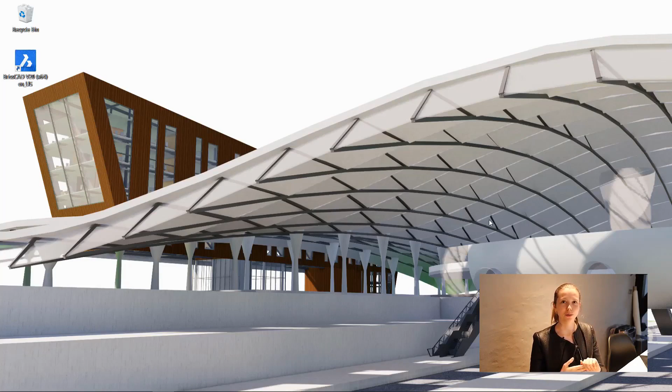We will use the profiles panel from which we will import profiles. We will use propagate to propagate details around our drawing. You will see just how powerful propagate is in combination with the details panel, where you can store details and where details can be parameterized so that they adapt themselves towards the new steel structure.

In this part, we will start by opening BricsCAD. You will be probably familiar with our workspace. We now need the BIM workspace, so I will open the BIM workspace, and then you can open a new drawing in a millimeter template. So choose BIM millimeter and choose new drawing.

So then you will see this interface. You are probably familiar with it. Remember, if you don't like the dark UI, you can always change it by right-clicking somewhere and changing to the white UI, but I will record this in dark UI because I'm quite a fan of it.

So what we will start off with is a grid. Launch your no-selection quad by right-clicking on empty space, and go to the model tab. There you can find the rectangular grid and choose grid to get started.

You will see that it's asking me to enter a first point. Down here at the bottom, you see enter first point. I will choose 0, 0, so I just type in 0, 0 and it will start there. Then if I scroll out a bit, you see that as I move my cursor, the grid is attached to the cursor, and I'm able to dynamically adjust my grid.

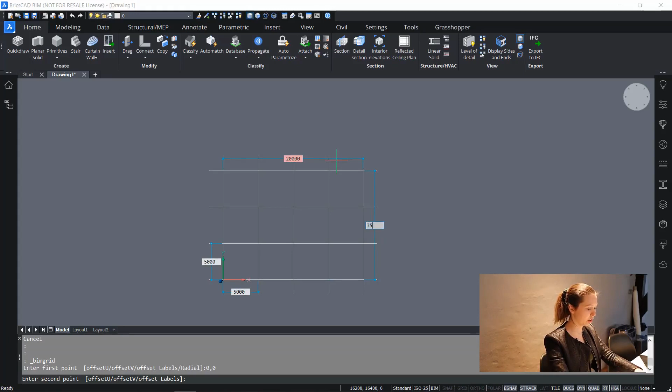You can start off by defining the dynamic dimensions of the grid cells itself, and then going to the overall dimensions. For this, we need just 5,000 by 5,000 grid cells, so we leave it as it is. Then we go to 20,000 for the width, and 35,000 for the length. If I press tab, I can switch to the next dynamic dimension, and you see the preview of the values already put in. If I now press enter, it will accept those defaults.

Then you will see a grid is created, which is automatically numbered from 1 to 5 and from A till H. If you would like to change this grid, a small reminder: you can use block edit.

Bedit is the command for that. So choose your grid and type in bedit. You will be taken into the create or edit block definition dialog, where you can choose your grid and choose OK. And then you see your grid as it is.

You can move grid lines by just using the move command or the manipulator. You can copy grid lines, that's the easiest way to add new grid lines. And you can see then in the properties tab, you don't see the numbers here, but in the properties tab the numbers are there anyway.

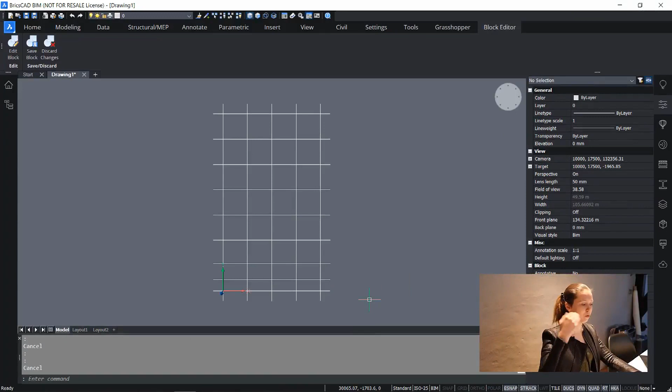So down here you see the BIM type is the grid axis and the number is B. That's because we copied the B element. If I stand on the second one, it's also B. So now I have grid lines A, B, B, C, D, and so on. I don't want that. I want to renumber them. So how do you do that?

You can use the number command. Just type in number. Select entities to number - those are the axes along the Y direction. Then you can say which number style you want, so type in N for number style, and then I want letters, so I type in the third option.

It won't sort them automatically in the Y direction, so you have to sort the entities again by using entity sorting. Type in E and specify that you want to sort them along the Y direction, then press enter again, and it will ask you to provide the first index. I provide 1 because this corresponds with A. If I now check my numbers, you see number A, then number B, number C, number D.

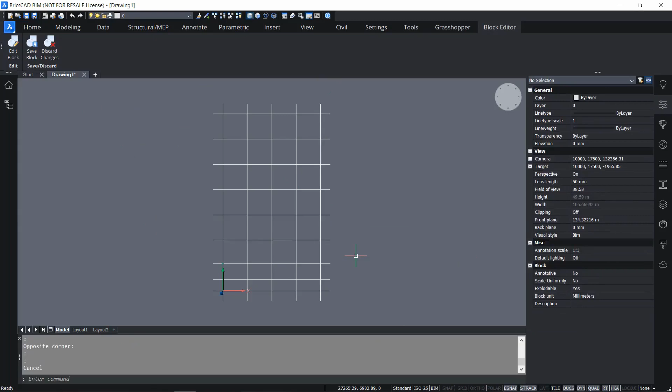And if I would now save the drawing, my grid would look like this. I don't want that now, so I will undo my changes and go back to the grid as we had it previously. You can save the drawing so that you don't lose it, so I will save it as Steel Hall.

You can also save through the BricsCAD icon and going to save or save as, or just type in Ctrl S like I did.

Remember, if you get lost along the way, there are also intermediate files. I will show you these. If I go to training, intermediate files, structural modeling, you will see structural 3, 4, 5.1. The name of the drawing corresponds to the step at which you can use it, so structural 3 is ready for step 3, allowing you to follow along easily.

So that's the first thing we want to do, is create the grid. But because we want to model further onto the grid and use propagate onto it, we also need a base slab to have this grid attached to a real 3D object.

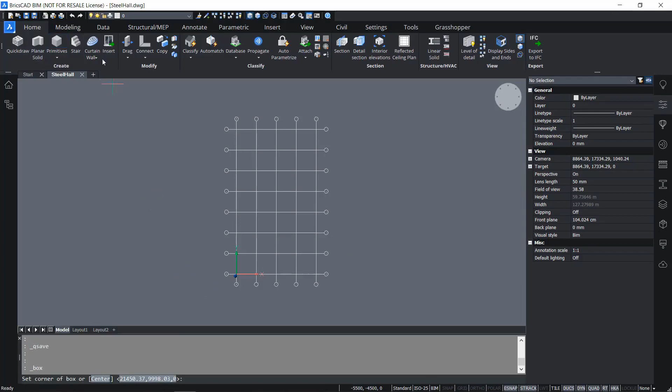So I choose box from the create tab, and I draw a rectangle as a base, and then if I go into perspective mode, you will see that I'm dragging it downwards, moving my cursor down by 500. That's the value I type in.

And then you see that I have a slab with a grid on top of it. I will give my grid a color so you can better see it. So this is now a grid with a slab underneath it. That's the first step you need to do, is making this grid.

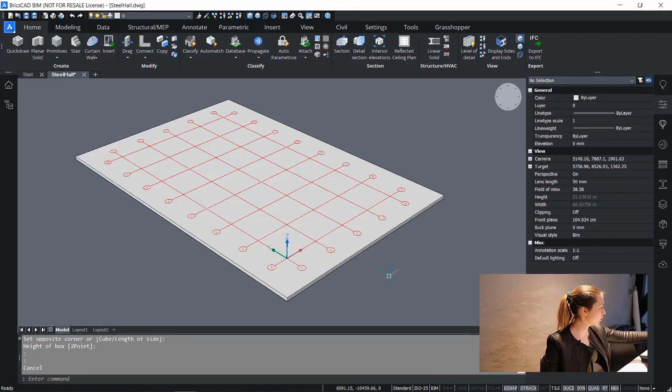The next step is to apply a profile from the profile library. So go to the structural steel domain. You can filter at the top of the profiles panel to structural steel. If you don't see the profiles panel, right click on empty space, go to panels, then BIM profiles, and make sure it's checked on. It will appear as an I shape in your stackable panels. You can now filter through the domains, structural steel, and the standard.

We will use the Euro standard for the entire duration of this exercise. Of course you could use other standards, but for this scope we'll focus on the Euro standard. Then you can search for HEA. You already see them here, but if you're confused which ones to use, it's the HEA.

So drag and drop the Euro HEA 300 profile into empty space. And if you zoom into your cursor, you'll see that a profile is attached to it. This means you can start drawing a profile.

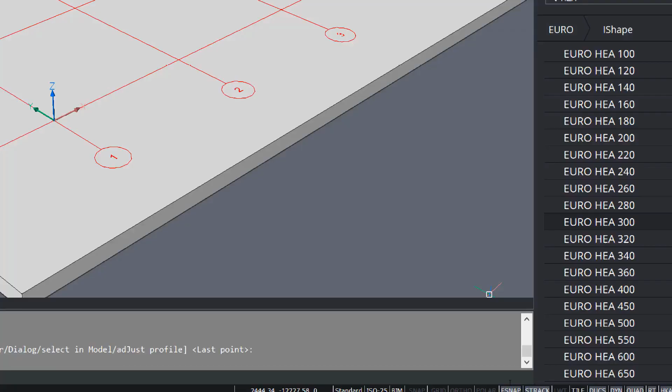I will escape for a moment because you need to turn on a setting, namely eSnap. Right click on it and put intersection on, so if a box is around it, it's on. Also turn on endpoint and midpoint since we'll need them further in this exercise. Make sure eSnap is toggled on - you see it highlighted - and you can also put ortho mode on to draw orthogonally in your drawing.

So drag and drop Euro HEA 300 in your drawing again, and zoom to the intersection of grid line 1 and A. You see that now it says it's found the intersection.

I click on the intersection, and then because ortho mode is on, you can draw orthogonally in all directions according to your current user coordinate system, which is currently the world coordinate system because we haven't edited anything.

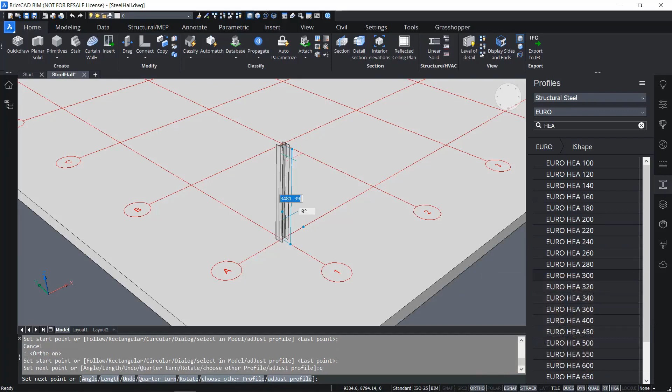You see that now my profile's flanges are aligned with the A axis, and I want them aligned with the 1 axis. So to change that, I type in Q for quarter turn, and then you see my profile changes by a quarter turn.

Draw orthogonally upwards and type in 5000 for the height, press tab to see a preview, press enter to accept. Then you see you can still model further, but we don't want that now - we just want this one column. So just press enter again or escape, and you'll exit the command.

What I now want to do is propagate this profile over to all of the grid intersections. I will do that using the propagate command. But first we will take a look at the column itself.

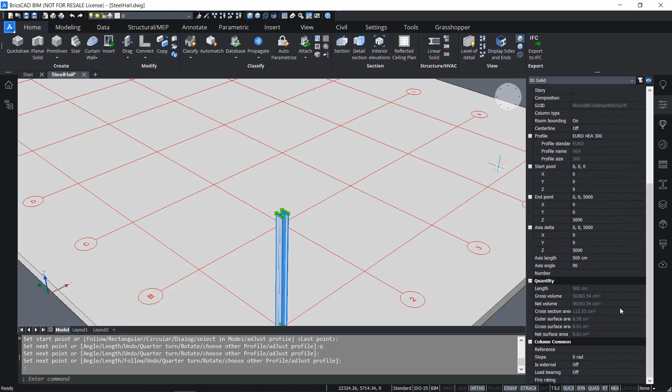Because we dragged and dropped it from the profile library, it will automatically be classified as a column because it's standing upwards. It will automatically have a profile, Euro HEA 300, and you'll see some other BIM properties you could assign if you'd like. But now we will just propagate this column over to all the locations in the grid.

For that, we will use the propagate tool. So launch propagate from the top under the classify tab. And then it's asking us to select base solids.

The base solid is what propagate will look at to find a similar location. We want it to be the grid intersection lines, just like the one it's standing on. But the column isn't standing on only the grid, it's also standing on the slab, and the slab has a grid attached to it. So the slab is the base solid because we want to propagate to other locations on this slab, which are defined by the grid. The grid itself is not a base solid because it's not a solid, the slab is.

The detail object is of course the column itself. So select the column. Remember to press Control if you have face detection toggled on. For now I want everything off, so no display sides and ends, no edge prioritization or face prioritization. I just want to select the whole solids, so I can easily select the sub-detail without holding Control, because my selection is set to select entire solids.

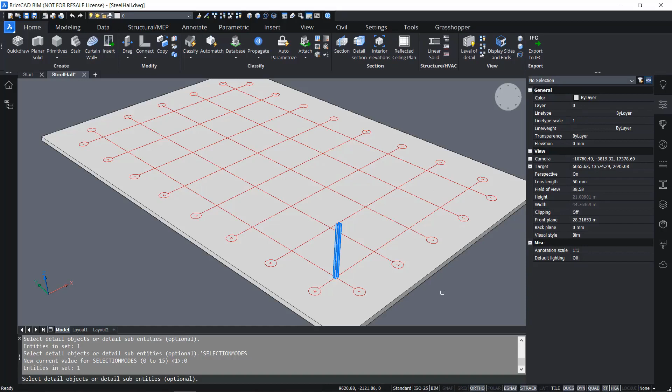Then I can press enter, and it will ask if this is what I want to propagate, asking me to propagate as a block or as a copy. You can propagate as a block if you want the detail object to always be the same, and if you don't want to model further onto it. But now I want to model further onto this column, so I want to propagate it as a copy, not as a block. So I type in C and press enter.

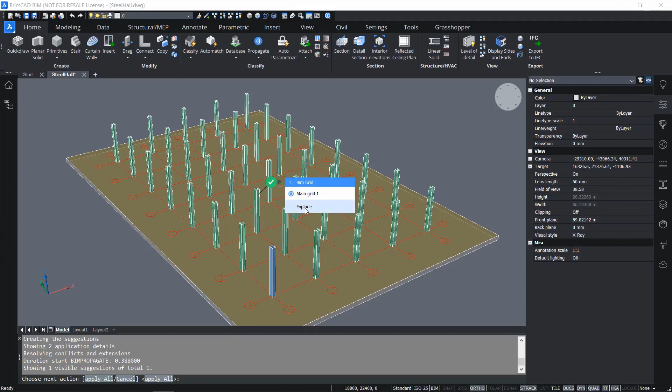You see it detects the grid and applies a profile onto all the grids, but I want to explode it into all the different options that are available. So I click on grid and then I click on explode.

Then it's exploding into all possible suggestions. You can toggle off the mid suggestions because we don't need them. Just make a selection box over the checkmark icons and toggle them all off by clicking once on them. Hide those you toggled off by pressing enter once, and accept those you still have left by clicking enter again.

And then you see this is what we wanted: the columns for the steel hall. We will now model further with the first two in the row, so I will isolate those. In the quad, go to the Select tab and go to Isolate Entities, and then you will see those entities which are isolated.

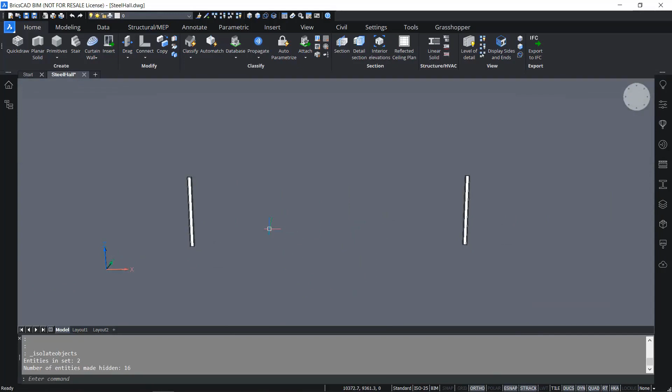Then I want to draw a line, so I type in line, or go to the Annotate tab and go to the line command. Then I start from the inside of the beam. Remember your display sides and ends is off, and also display axis is off. So go to the Structural tab, and in the View tab make sure everything is toggled off, because otherwise if you display axis you can only snap to the axis endpoint, and if you display sides and ends you will snap to the sides and ends. We want to snap to the real geometry of the column.

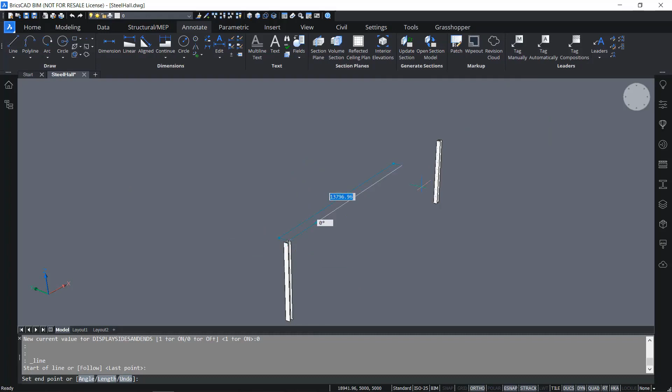So we want only nothing selected as snap, except for the midpoint, which we toggled on previously by going to eSnap and toggling midpoint on. Again, go to the Annotate tab, choose line, go from the inside of the column, the one facing the other column, and snap to the midpoint, the midpoint of the flange to the inside of the other column. If your ortho mode is still on, you will only be able to draw in orthogonal directions. That's convenient now, because we only want to snap to the other midpoint, which is orthogonal. So snap to the other midpoint that's inside of the column.

Then if I show you in non-perspective mode, by right-clicking on the look-from icon and choosing perspective off, you see that I drew a line that connects the insides of the columns.

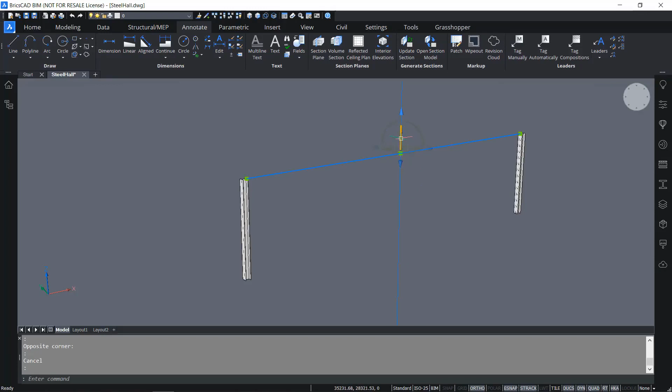So I will put perspective back on, and we will now move this line downwards. If you have nothing selected, press escape, then long click the line until the manipulator shows up. We already used that in previous exercises to mirror and move things. Now we choose the down axis and move our line 400 downwards by typing 400 in the input field, and you see it's moved 400 down.

Now I want to make a truss from this line. You could model everything by dragging and dropping a profile directly into your model space, but what we will do now is draw lines, and from these lines convert them into profiles and make a truss out of this.

So I will construct a truss from this by drawing a few more lines. I hit the line command again, snap to the midpoint of the line I drew previously, and draw upwards 1400, with ortho mode on so I can model further. I'll put ortho mode off now because I need to go to the midpoint of the inside of the flange again. Then I press enter, and I have the shape of the truss I wanted. In between those two lines I will weave a pattern, making the truss of my structure.

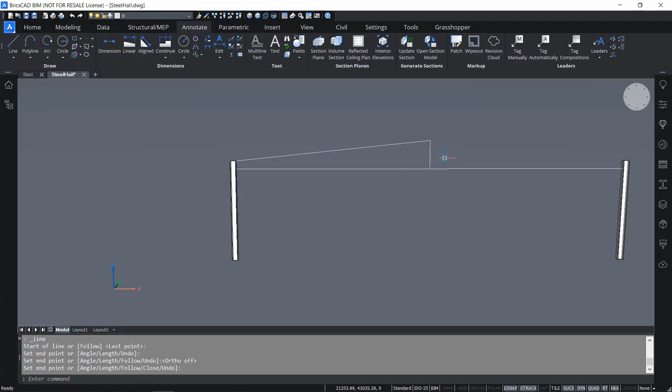Now you have the big beams of your structure, but not the little members that make up the truss diagonals. So what I'll do now is divide the upper and lower lines into small points, denoting a specific division of each line. The line will not literally be divided into smaller lines - points will simply appear at the division points.

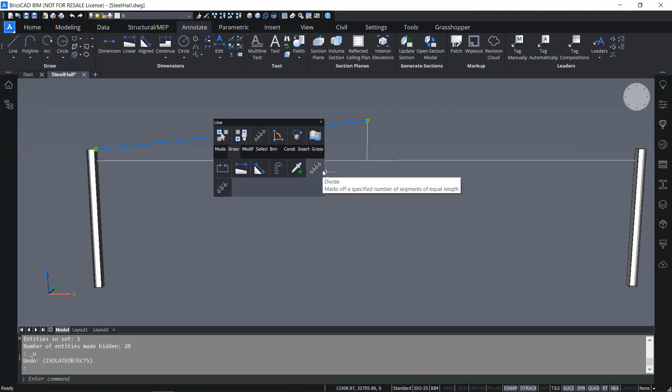So I stand on the line and go to the Draw tab of my quad and select Divide. Make sure you don't select Measure, because this icon looks similar, but select the Divide command and click it. Then it asks me to enter a number of segments - you can see in the command line at the bottom of my screen that it's asking for a number of segments. I want 10 segments, so I click enter.

You don't see anything happen yet, you would think, but if I make a selection box over this, you see that it has created some points. But how can you display these points easily?

That's a setting. If you type in settings and go to PD mode, that's the point display mode, you can uncollapse it and choose, instead of 0 which represents a point, 3, which represents a cross. If the point display size is on 0, it will automatically adapt to your zoom level for the preview. So now it previews as a cross with a dynamic point size. You can close settings, and as you can see, we can now visualize the points, and whether I scroll in or out, they always display as the same amount of pixels on my screen. That's convenient to see what we're doing.

Again, we want to divide the lower line into an amount of segments as well. Because this is twice as long, I will divide it into twice as many segments, namely 20. So the divide command should be the first one to pop up on your quad - select it and type in 20 for the amount of segments. Then you can see it's nicely divided into as many segments for both the upper and lower line, and we will now weave a pattern in between that.

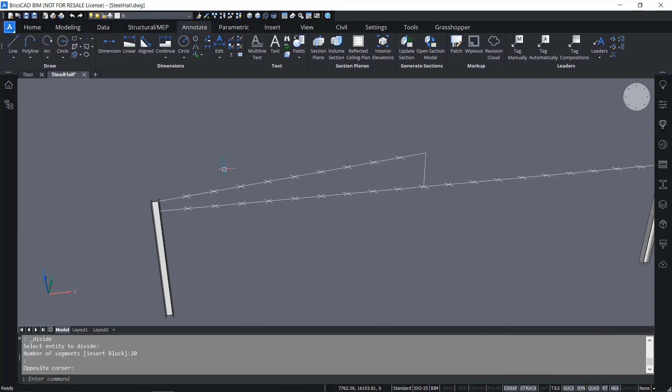For that, your endpoint selections should be on, your eSnap should be on, and your node eSnap should be on - which I haven't mentioned yet - so you can snap towards the points. With me it was already on, so I can launch the line command again and start drawing from the endpoint of the line, go upwards to the first node, go downwards to skip one of the nodes, and weave a pattern in between those.

Just like this, so that you actually created a truss. I can show you again if I go to the front view and put perspective back off. You will see that now I created a truss, which is good. This is what I wanted. So this is now a truss, but it's only half of a truss.

So we will need to mirror the first half to create a whole truss. But first I will delete the points because I don't need them anymore. Select the points in the structure browser. Just go to the structure browser, uncollapse entities, and delete the points by hitting the delete button on your keyboard.

And then I can start mirroring the lines. So select the lines you want to mirror, and then from the quad display in the modify tab, you display the manipulator, and it will show up somewhere in the middle probably. We want to reposition it. How do you do that?

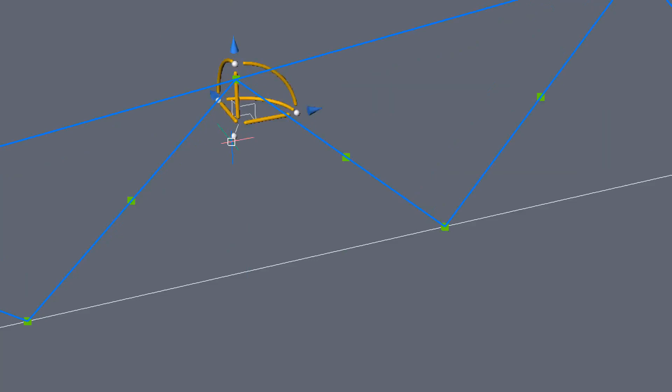You can click the white grip, and then you can move where the manipulator is standing. I want to move it to this midpoint, and it shouldn't be rotated, because if you snap to another line that's a diagonal, for example, then it will rotate itself. That's because your dynamic UCS is on, so it will rotate itself to the dynamic user coordinate system, which it detects from the entity.

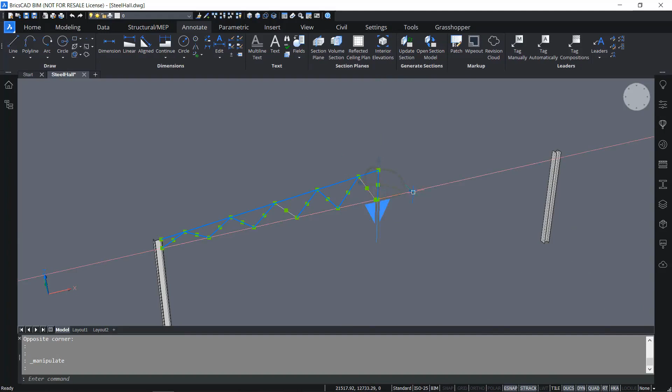So you just want to position it in the middle here, and then we want to mirror. How do you do that? You have these blue lines, these blue arrows, and these are the ones that you need for mirroring. So I select the one in the X direction, and then you see I'm mirroring this entity. If I don't do anything, it will just mirror it and won't make a copy or anything.

So to make a copy, type in C and press enter. Then it says copy mode, multiple copies, which is what we want. Then you can enter a distance of 0, because it just needs to be mirrored along the position where we positioned our manipulator before. So press 0, then press enter again, and escape to exit the command.

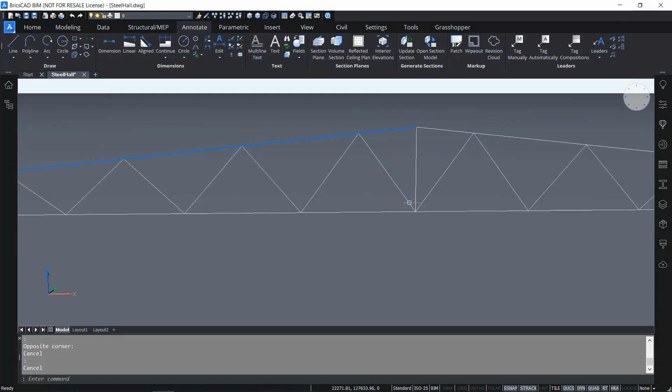And then you have this truss like you would want. I see that I haven't snapped appropriately to the endpoints, so I will adjust that so it's snapped towards the endpoints as we want it. You see that even after you modeled, you can still adjust your lines to what you need, because now that it was mirrored, I saw that these two lines did not converge in one point. So now I adjusted that. You would probably already have it correctly.

If I now delete this middle line, you will see the truss as we want it. So you can save your steel hall and we will work further with this. Like I said, we will do everything in the Euro category.

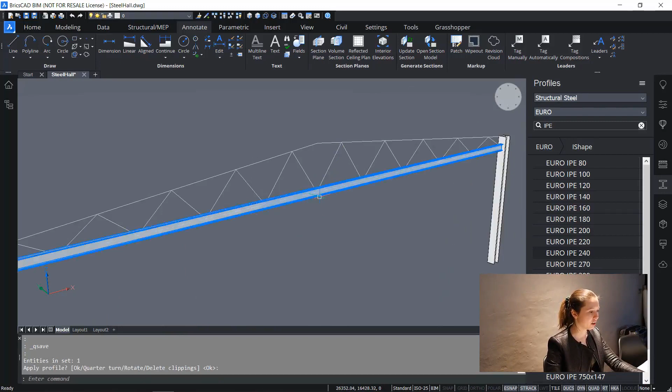How can you now convert a line into a profile? Well, it's pretty simple. You just drag and drop the profile instead of onto empty space, you drag and drop it onto the line. So if you now search for IPE, the 240 we want for the lower line, just drag and drop onto the lower line. Then you see it applies, and if the quarter turn is good, if it's positioned nicely with its flange like it is on the screen right now, then just hit enter to accept it. And you see that the line has now a profile attached to it as well.

You could drag and drop each time for every line, but that's a tedious job. So you can also select multiple lines and choose now IPE 200 for the upper lines and just drag onto your selection. Then you see both elements will display a profile, and just click enter to accept if the rotation is correct again. Then you can select all the truss lines, actually the small braces. You can do that with a selection window or from the structure browser if you would like that, but I think it's easier from the model space. And then you can drag and drop IPN onto this, the IPN 100.

Drag it onto your selection, and you see that it's applied to all of them. Click OK to accept, and your first profile is completed. Save your file again so that you don't lose your changes.

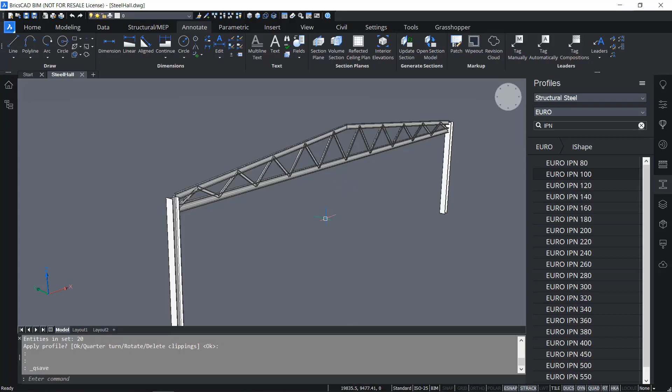While we were applying profiles, Bricscad suggested what type of elements these are. If you select the horizontal one, this will be a beam. If you select the diagonal ones, this will be classified as a member. If you select the upper ones, these are classified as member, but I think they are more beams because they are the large structures in my drawing, so I will classify them as a beam.

Under the BIM tab in your quad, choose classify as beam, and then it will be classified as a beam.

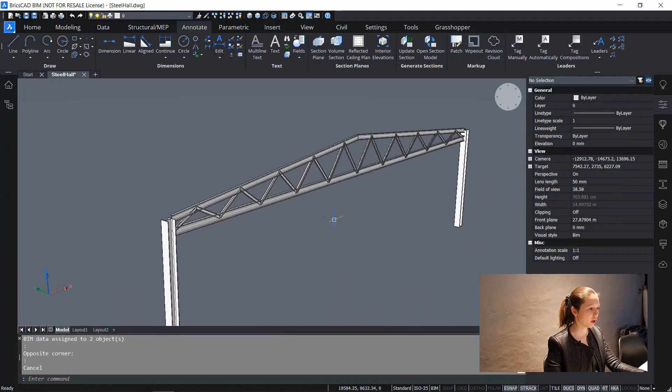Now we will also be able to use this in our propagation, because in our propagation we will have a detail for this connection, based on a beam and two members. That's why it's important to classify your top beams as beams instead of as members, so that the propagation later on will work, because Propagate looks at the classification of entities to see whether or not a detail fits.

Now we have everything classified and made as we want. The only thing left is to delete the lines that are still there. The lines were not deleted so you could use them further, but we don't need them anymore, so you can delete those as well.

Again, save your file to make sure you save your progress. What we will now do is propagate the truss onto all our columns.

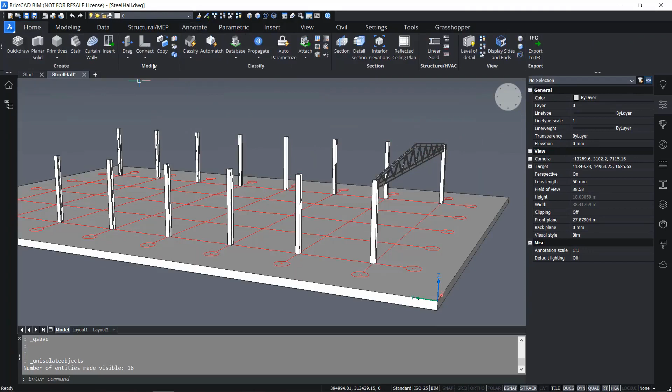To do that, we have to show everything again. You see we have a whole bunch of columns where no truss is in between just yet. So how do I use propagate to propagate this truss entity over to all the columns? Well, I kind of already said it: I propagate with the columns as base solids, because these define the location where the details should be propagated.

As details, I now choose my truss, because this is not present on the destination location just yet, but we want it to be there. I click enter, and then again it's asking if I want to propagate as a block or as a copy. I want it as a copy, so I type C because I still want to model further on it, and then it will create my suggestions.

Of course, I will also find the bottom ones, because propagate does not recognize that the bottom is different from the top — in essence, these two connections are the same. So I make a selection box over the lower check marks, click them to make them a cross, enter to delete the crosses, and enter again to accept what is left as check marks.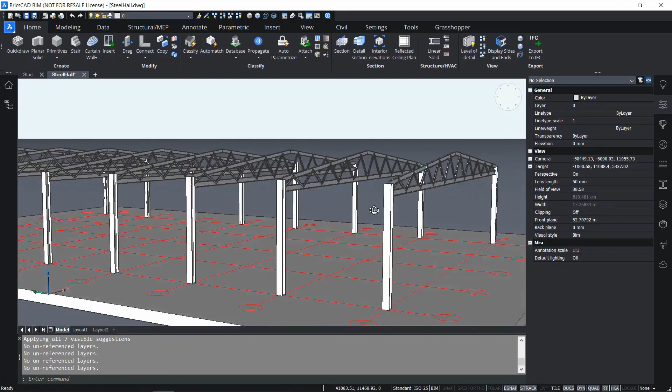And then you can see that these are all propagated along just like I wanted, which is nice. You see just how easy it is to propagate one detail into various types of locations.

It does ask a little bit of training to see what propagate should want as base solids and as detail solids, but we will use propagate further on in this training, so you will get used to it.

What we will now do is add some sidebars. For that, go to the profiles panel again and hide the slab and the grid. Just select them, and in the select tab choose hide, because it will make it a little bit easier to model.

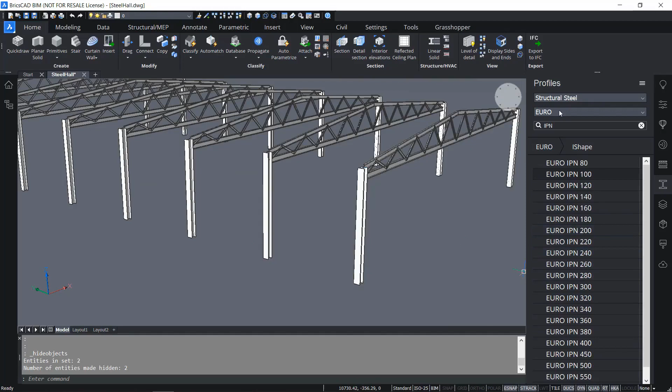I will model a sidebar between the first two columns and then propagate it into our entire drawing. So I want to go to the Euro tab, but now I want a UPN. It's not an I shape, so I won't find it in the I shape category, it's in the U shape category. There I want to find the UPN 120, and drag it into empty model space so we can start modeling again. Where do I want to position the first point? The midpoint of the outer flange of the first column.

And there you snap to the midpoint, and then you snap to the midpoint of the second column as well in the Y direction. So snap to that one. Make sure that you shouldn't have snapped if your orientation was not as mine. So make sure it's oriented like this, and use a quarter turn if necessary.

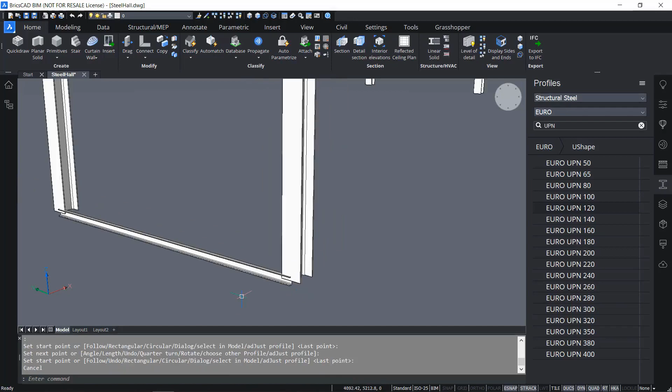Then I don't want to draw any further, so I press escape. And you see that now the sidebar is crossing my column. I don't want that, so I select my sidebar and go to the structural/MEP tab, and under the modify tab I choose add eccentricity, then I choose the outer arrow, and you see that the solid will shift as opposed to its axis. So the extrusion path will shift as opposed to the axis, and then you can click enter.

And now it's positioned correctly, just at the side of my flanges instead of crossing my flanges. I now want to long click the sidebar and move it up with 1500.

Because this is the manipulator we want to use to move the sidebar up. And then you don't need to escape the manipulator. You can use the manipulator again to copy multiple copies on top of each other, a bit like an array, but then in separate objects instead of as one array.

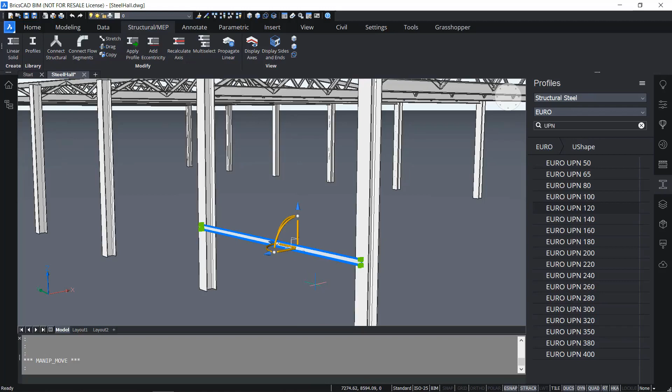So what you can do is press the up arrow again, and then type in R for repeat, and then it says copy mode repeated copies. If I now type in 900, it will always take a distance of 900 in between the copies. So as I move my cursor upwards, you will see that the bars are attached to my cursor. This is pretty convenient. It's a bit similar to an array, but then it will make separate entities instead of one.

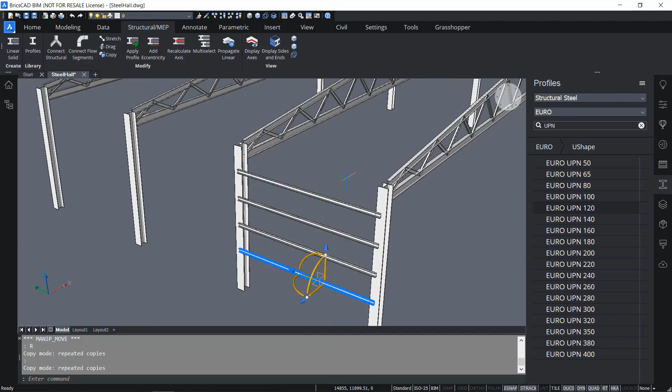And you want to make sure that you have four sidebars, and then just click in your drawing if you have 4 bars, and then press escape to escape the command, and then you have the 4 bars as you would like them.

We now want to use propagate. And how would we use propagate? Well, we already have the columns everywhere in place, but what we don't have yet are the sidebars. So what we do is we launch propagate with base solids, the 2 columns. Press enter. As detail objects, you want the sidebars, because these are not at our destination locations just yet. Then press enter. Then it's asking me as a block or as a copy. In fact, you can choose, but I will now make a copy, because if you would want to model further, then it's useful to have a copy.

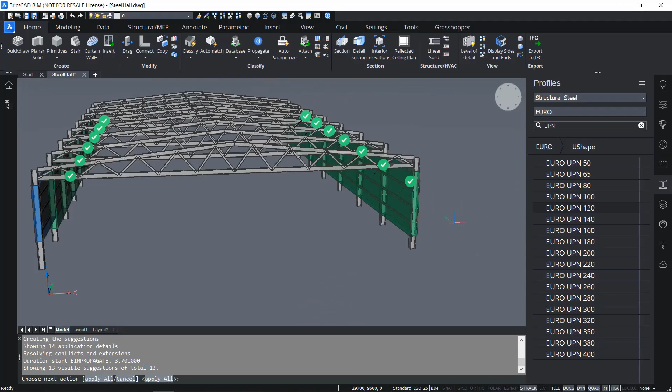And then you will see that it nicely makes the other suggestions at the left-hand side. But at the right-hand side, it detects as first option to be at the same side as the one we were at, but we want it to the outside instead of to the inside, because this becomes the inside at this side. So I want to choose the alternative option, option 2. And I want to do that for every one of the check marks, so that you always have the option of the sidebars at the outer location of your structure, and then press enter to accept.

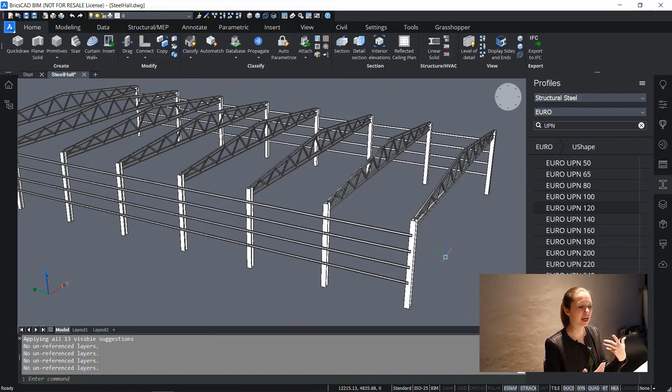And then you will see that in fact they are at the outer location. So that's good. We now modeled some sidebars where you could now model further cladding onto, etc. But for now we will continue with cleaning up some details, because we have now our structure.

It could be that you are satisfied with this, but I want to clean up these connections as well. So I will start with the top, because the top is not nicely mitered now. It's just really not attached to each other, just straight onto the profile. So I want to launch the L-Connect tool from the Model tab, the L-type connection. Not the structural connect, but the L-type, because I have 2 beams and I want to connect them in an L shape.

So the first option is a miter connection, which is good. So I just press enter. And then you see the connection is nicely mitered, and we can propagate this along to all the other destination locations.

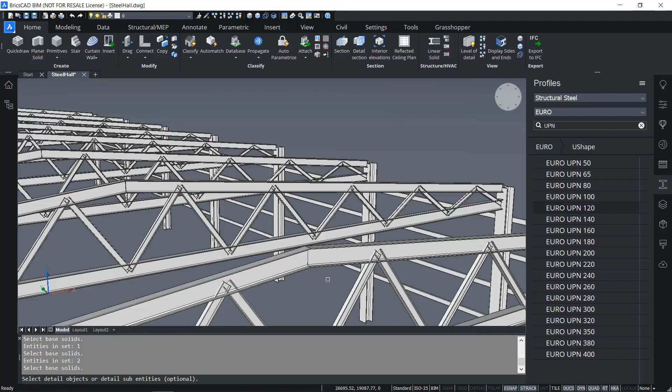So launch propagate, and as base solids you now have the beams because they already exist in the destination location, and you press enter. As detail objects, well, there aren't any details we want to propagate along, so just skip that step because it's optional. Just press enter to select nothing. Then it's asking me if this is what I want to propagate, so I choose yes by pressing enter.

And then you see it gives me all the check marks. It has a little exclamation mark next to it because there is some interference if you propagate this detail. That's nothing to worry about because we will fix this in a later step. So just apply them all. And then you see the second one is also nicely mitered, as well as the third one, and so on.

Now I want to model this part better. So I select those three entities, and I now will use the structural connect tool. Structural connect joins two or more elements in a smart way, so that's why I use it here.

You see it automatically detected that this member should only come to this beam, and this column should be nicely to the side of this beam. Then the last thing I want to do for this connection is to L-connect these two again.

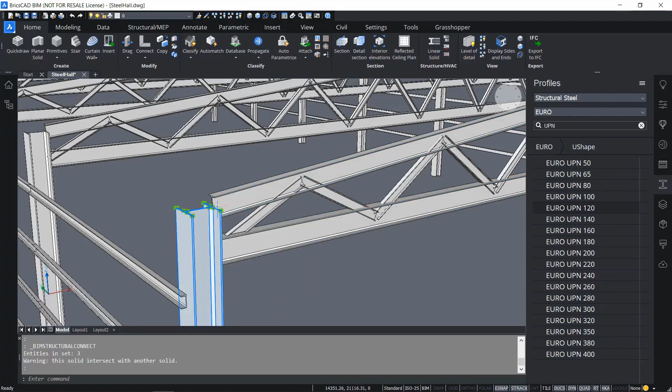So instead of structural connect, choose L-type connect again. The first option is again a miter connection. I don't really like this in this case, so I press Ctrl once, and then I see it is now to the side of it.

This could be a valuable suggestion, but I want this suggestion where the beam is on top of the column. So I press Enter and accept this suggestion.

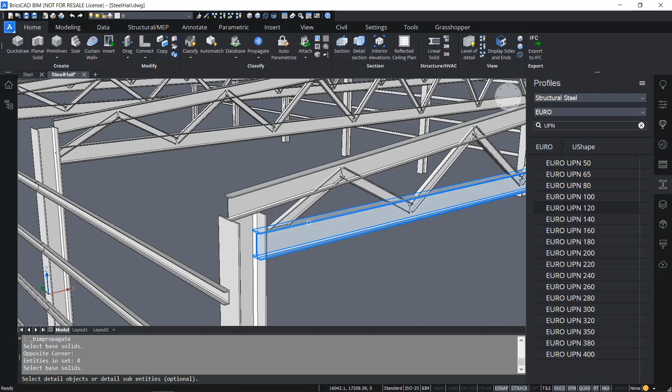Now again, we can propagate this detail to the other locations. So launch propagate, select the base solids - these are the four profiles. The detail objects, well, there aren't any, because the base solids are already in place and there is nothing we want to propagate along. So just enter this step, since you don't want to enter anything.

Then it's asking me, is this a detail that I want to propagate? I say yes. Now it will find all the possible suggestions, and I press Enter to apply them all. So then you see that all the connections are nicely modeled again, and propagate did its job.

There are other ways to propagate a detail into your drawing, and that's the details panel. In the details panel you can store details and reuse them in other drawings, or you can parameterize a detail so that it adjusts itself to a certain angle or tolerance. So we will now take a look at the details panel.

Go to the details panel, and you will probably have an empty details panel, or if you already did the previous modules of this training, you will have some folders here, but not the ones that we need. So I will show you again how to add a library.

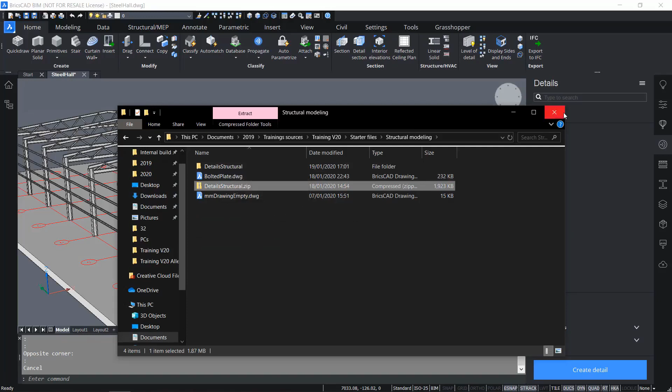First of all, in our training folder, go to the starter files, to structural modeling, and there you have a details structural zip file. You can unzip this one to details structural, because we need the folder unzipped to add it to the libraries.

Now go to the three stripes at the top of your details panel and go to manage libraries. You will enter the settings dialog, and if you press on the three dots here, you will enter the pod list. There you will probably already have the standard pod where your custom details are saved when you create them from the panel, or you will also already have a pod that refers to the other part of the training.

Now we want to add the third pod, or second one in my case. So I click add pod and click on the three dots again. Then I go to my training files, to the starter files, to the structural modeling folder, and there I choose the unzipped details structural folder, select it, and press OK. You should immediately see a structural folder show up in your details panel, and if you click it, you should see three connections there.

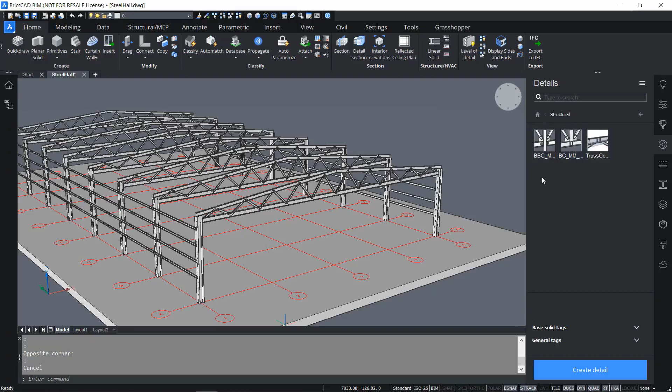We now want to take a look at the truss connection. If you just click it once, it will open this preview, and you see at the top that it says parameterized. What does it mean? Well, it means that it can adapt itself to certain tolerances.

For example, the angle can differ 45 degrees from the originally modeled detail, so that it still adapts itself to that model, to that found location. The profile dimensions can differ by 200 millimeters, and the offsets by approximately 100 millimeters.

So you could open a file here, but now we will propagate this file. Just click propagate, and then it will take a while to find all the suggestions, because we have a lot of different angles for the truss in our model. We want to find all these locations for the propagation, because since it's a parameterized detail, it will morph itself into the correct position - this is why it takes a while for propagate to find all the similar connections.

And then it found all the suggestions, and you see that there are a lot of suggestions, so it's normal that Propagate took a while. We want to apply them all, so we just hit enter.

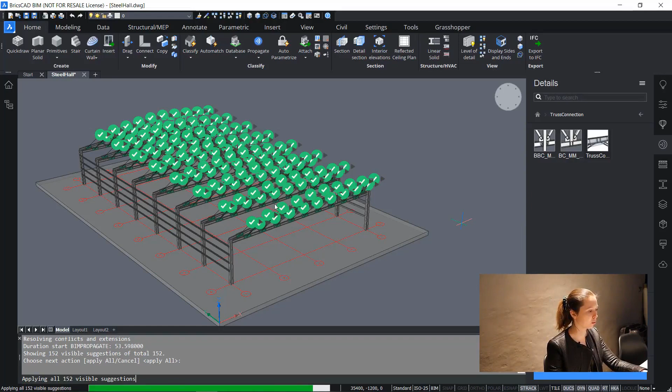Again, now the morphing will really happen, so it might take a few more seconds, but then it will apply all those details, and we will have a nicely detailed model.

So you can see now that it's done with the morphing of the geometry, and it was updating the linear axis. And if I zoom in, you see that now the connections are nicely modeled. Even the plates adapt themselves to the profile, because one profile was bigger than the other, and still the plates adapt themselves. So that's pretty convenient that you can use Propagate on a parameterized detail.

In the next step, we will make a detail for the details panels ourselves. So what we will do is we will isolate the first column and beam. Go to the selection and isolate the entities, so that you only have this one left. We will create a plate, a bolted plate at the end of the beam.

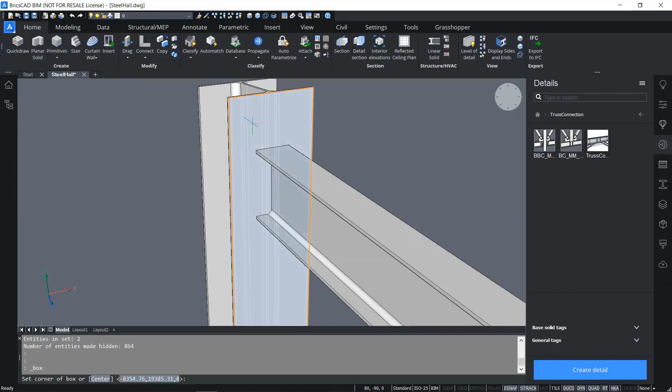So you can draw a box. While you have launched the box command, you can press shift to lock this face, and now I can start drawing anywhere on this face. I want to start drawing on the end point of the beam, and then I'm drawing inside this face. I want to end at this end point, at the other corner point of the beam, and I want a distance of 10 millimeter, so a 1 centimeter thick plate.

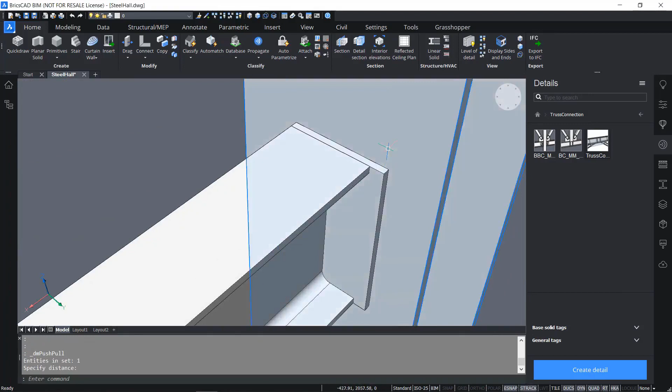You see now they are still overlapping, but we will fix this in a minute. So if I now select one of the side faces by holding down Control, I can push-pull this face. I want to push-pull it with 20 to each side, and then you see push-pull automatically subtracted the push-pulled object from the other objects it's crossing. This is a setting called DM push-pull subtract. If you put it on, it will automatically subtract; if you put it off, it won't subtract, and then you need to subtract manually. But in this case, it was convenient that it automatically subtracted.

And then we can go to the components panel. If you have here the Bricsys design library, click on the three lines again and check Bricsys design library. Then you should have a folder called standard parts. Open that one up and go to the bolt category, then go to the hex head category and to the ISO category, and then go to ISO 4015.

If you drag that one into the drawing, you will see that it's attached to your cursor, and it automatically positions itself in the surface you are working on. So we can position this bolt with the dynamic dimensions. We can give it a distance of 30 from the side and 55 from the top, and then press enter to accept this destination. And you will see now we have a bolt in place.

We can now use Propagate to distribute this on an imaginary grid onto the solid face, onto the solid. So I use Propagate to have this solid as a base solid, because that's the location that I want. So I select this as base solid, and as a detail object, I select the bolt.

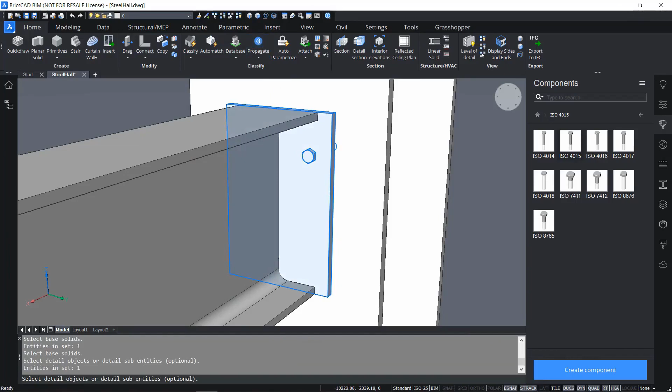Now it's asking me if this is what I want to propagate, so I select yes, and it's giving me a question mark. If I turn it into a check mark, I will see already one suggestion based on a similar location, but I want to base it on a grid, an imaginary grid that it creates onto the base solid. Then you can choose - you have standardly a 2x2 grid, and if you add a row, it will add one row. So this is what we want. Click enter to accept, and as you can see, it turns red because it's interfering, but we won't mind for that just now. Click enter to accept, and you have this nicely bolted plate in place.

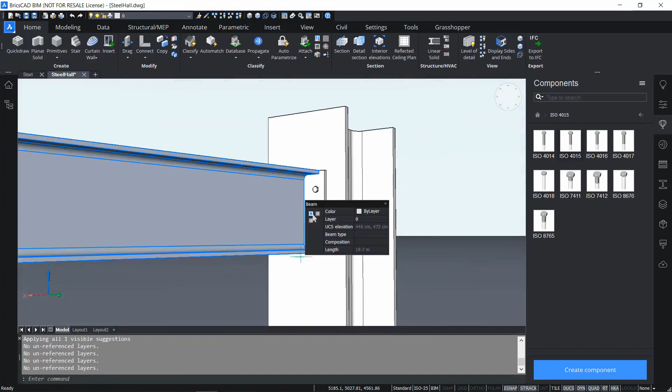Then I still want a plate for the beam to rest on during construction phase. So I will extrude this face - don't use push-pull, but use solid extrude. Then it will create a new solid instead of push-pulling the existing solid, and extrude it with 15 downwards. And now push-pull the front face with 40.

So we have a 15mm plate on which the beam can rest. Imagine that this plate is welded onto this column, and this plate is welded onto this beam, and then it's bolted in place with the bolts. What we have now is just solids and block references, but that's not what we want.

So I want to select those two plates and classify them. Go to the BIM tab and choose Classify Manually. Then you will enter this dialog and you can search for plate and classify it as a plate.

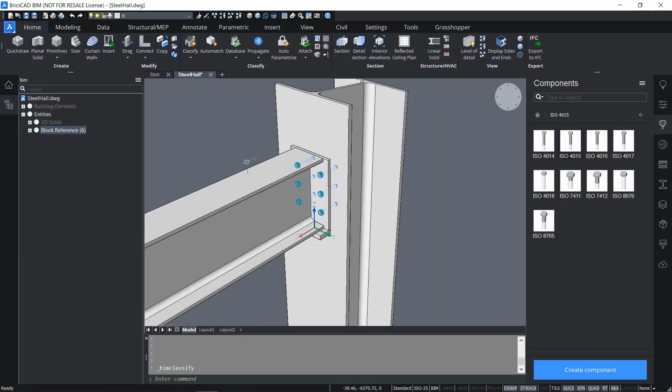Then you can go to the structure browser and choose the 6 block references. These are the 6 bolts. Again, I can use Classify Manually to classify them as a mechanical fastener, so choose fastener and choose mechanical fastener.

And then you will have 2 extra plates and you will have 6 extra mechanical fasteners.

And then I'm not fully satisfied just yet. I want this to become one block, so I classify it as one block, and I will classify this block as a building element.

So if I just type in Classify Manually again, or go to the quad and choose Classify Manually, I can search for building element, so I choose building element. Then down here, I check the option convert to block and classify the block reference.

And I choose a name, so bolted plate, for example, and I choose OK. Now you will see this has become a block called bolted plate. So that's an easy way to convert an entire set of elements into a block that's already classified.

So we now have this block and we will create a detail. To do that, go to the details panel and click on the create detail button. Again, it's kind of similar to propagate.

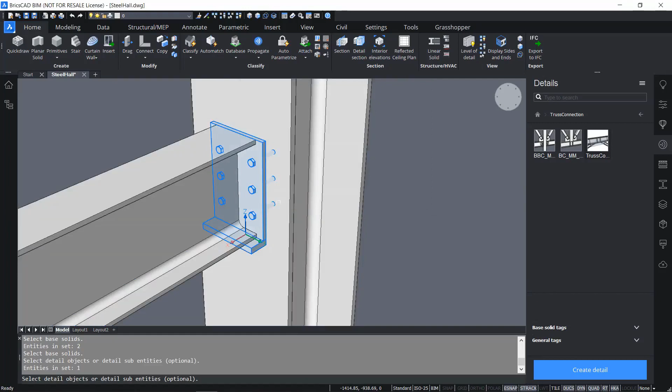So I select the block reference or the building element, and then I need to give it a name, so bolted plate, for example. I need to choose a category, so the one that I'm currently in, and I need to select create.

Then it's asking me if this is the detail I want saved. That's okay for me. You can still adjust the thumbnail shown in the details panel by clicking on this pencil, repositioning your view and clicking enter. You could give in some tags, but we won't cover that now. And then you can click save.

And then if you now go back to the structural, you will have a bolted plate. If you now isolate everything, or show everything again, you can now drag and drop this bolted plate into place.

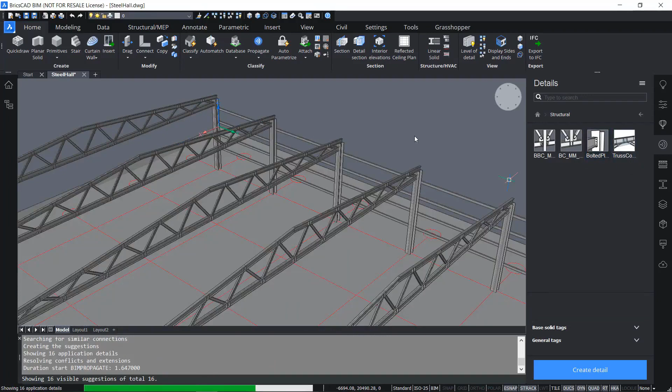And then you will see it gives me all the suggestions, and there was a question mark in the beginning that I turned into a check mark because it will then replace it by the detail found in the details library. So press enter to apply them all. And then you should see that the bolted plate is in place.

So that's easily how you create a detailed connection, but as you have seen before, it was still interfering with my column and my plate. The bolts were interfering with my column and my plate. So I want to adjust that.

For that, I will just undo some steps, undoing until the point that I have these loose, loosely classified elements again. And now instead of making a block from it, I want to make a component from it. Why is that? I want to be able to replace the component by another component that's already in your starter files later on.

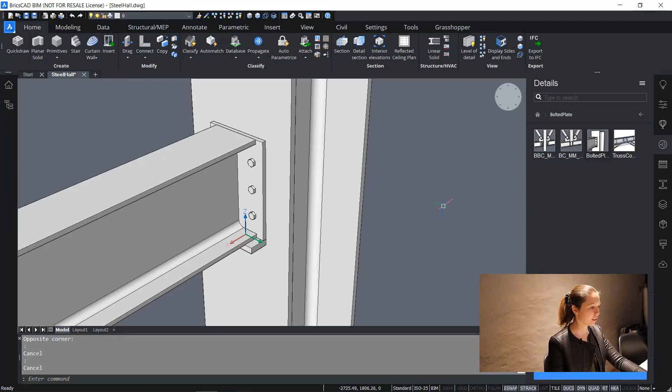So to do that, I will use the command bmform, but before we use it, we have to make sure that our user coordinate system is oriented correctly, so that if I insert the component, it will always be with its back onto the face that I'm inserting it onto.

So I want to set my UCS to this face of the column, to this one. I will do that by typing in UCS and selecting F for face, and then selecting the entity. From the left-hand side, you should enter the face and select it like that, so that your Z-axis is pointing away from your surface, your X-axis is pointing kind of towards you, and your Y-axis is pointing upwards. Then choose enter to accept.

And then I will create a component by selecting everything I want to be in my component, so these are all the bolts and the plates. And then I type in bmform.

I type in L for local, because I want to make a local component out of it. Then I choose an origin point. It's asking me to choose an origin point, and I choose the midpoint of the plate towards the flange. And I give it a name, for example, bolted plate component.

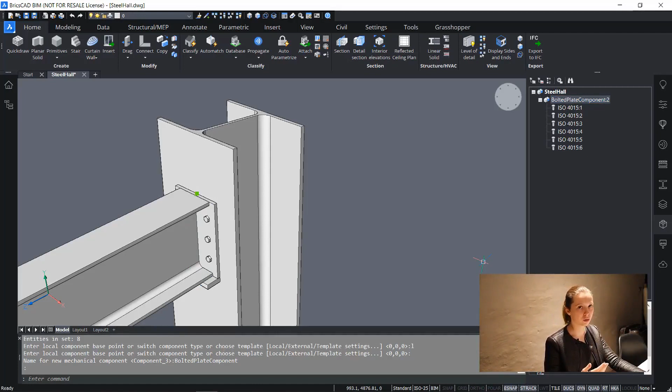So BMFORM is actually a mechanical command, but it's also available in BIM, because in BIM we also use components for chairs, for example, or for windows. Because you can then insert them with parameters in your drawing, and it's like a smart block.

So you now have created this component, and before you had just a block and didn't have the options of open a copy, or replace, or dissolve. These are all options that come because we have made a component out of it.

So what we now can do is replace the source file. But before we do that, we have to set our UCS back to world, so that our X-axis, Y-axis, and Z-axis are again in the world coordinate system.

Now I can hover over my element and choose replace. Then I choose from file, select bolted plate.dwg, and press open. And then you see it placed itself in the same location. This is because our definition plane was the same as the plane in which we modeled in our drawing.

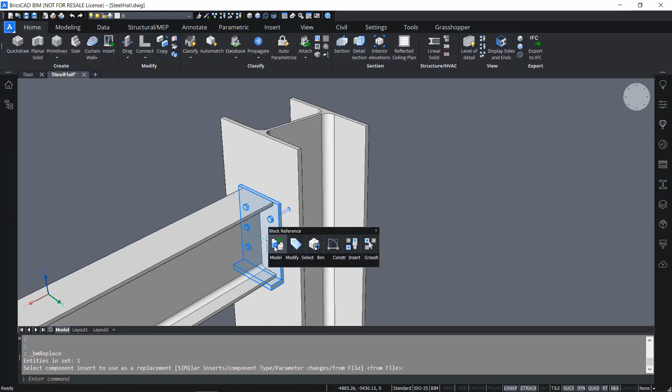But you might not have seen much difference. Why did I change from the one block reference to another? Well, if you open a copy now, you will see why. You see that it's kind of pinkish here.

If I show my layers, there is a special layer here called the BC subtract layer. If I only show that one, then you will see there are just some cylinders which represent holes. So the BC subtract layer holds solids that represent holes.

Once you insert the solid as a component, or as part of a component, into another element or another solid, it will make a hole out of it. So it will be a solid that creates a temporary hole into another object.

So you can close this drawing again, you don't need to save it. And then you can see why it's useful that we replaced this component, because now it will create holes into our column.

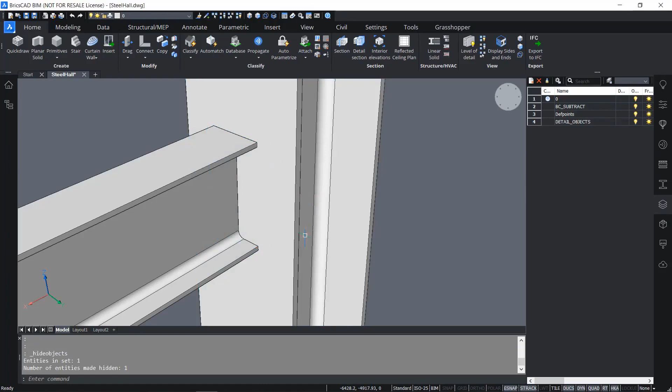But as you can see, the column, if you hover over it, there are no holes in it. If you hide the component, there are no holes in our column just yet. So show your component again.

What you now need to do is hover over your component and choose Update Selection. Then it will create features, as it's called. It will create the holes into your column.

So if you now hide the entities, you will see that the columns have holes, but these holes are only temporary. If I show everything again, and if I now delete this component, you will see the column has been restored. So it's a smart hole that's created, and that's what we wanted.

If we now turn off the BC subtract layer and run the interfere command, they won't interfere anymore. As opposed to what we had previously, where all the bolts interfered with the columns and the plates, we won't have this problem anymore. So if you launch interfere, you won't find any interfere solids anymore.

But you haven't propagated it into your drawing just yet. So what you can do now is make this a detail as well, like we did the previous time. So again, the base solids are the beam and the column. The detail entity is the plate, the component this time.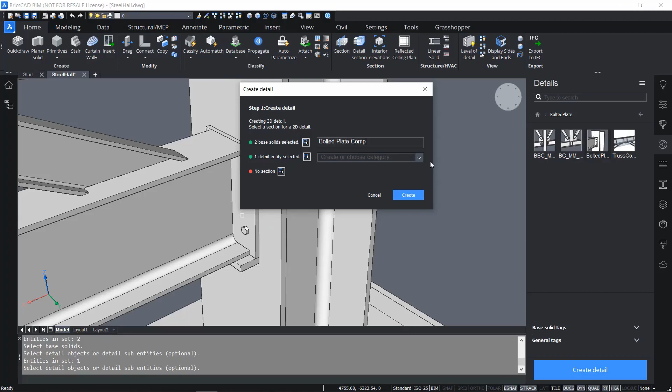So I will say bolted plate component. I will choose the category again and choose create. It's asking me if this is the correct detail. I choose enter to accept it. You could change your preview and click save. And then you will have a new bolted plate component in there.

If I drag and drop it into my drawing, if you have made everything visible again, you will find all the options again. So check mark all of them and click apply all.

And then you will see it's propagated all the way until in our drawing, and the holes are automatically made.

If you delete it, again, it's a smart hole. If you hide it, you still see the hole. If you delete it, the holes go away. So it's a smart hole that restores itself once it's not present anymore.

So if I would do interfere now, and I choose everything, and check against the same set, so just check first set, press enter, and then it says solids do not interfere. So this is thanks to what we just did with the interference solids.

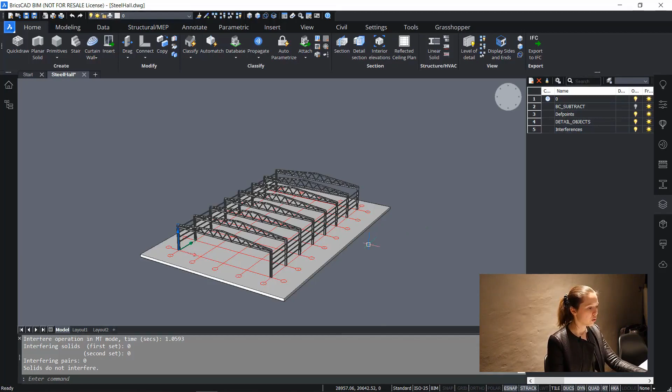Make sure you have toggled them off here, because otherwise it still sees it as solids, because these solids are still there, but they create holes at the same time. But the solids themselves are still in your drawing. So that's why it's a smart hole. If you delete those solids, the holes will also be deleted. So that's how you avoid interferences like we had before.

Then you can save your file, and I have some extra optional steps for you.

One of that is the diagonal braces. So choose in your profile panel, choose the L-type Euro again, and the Euro L 35x35x5. And if you just drag it into empty space, I now want to create it from this face.

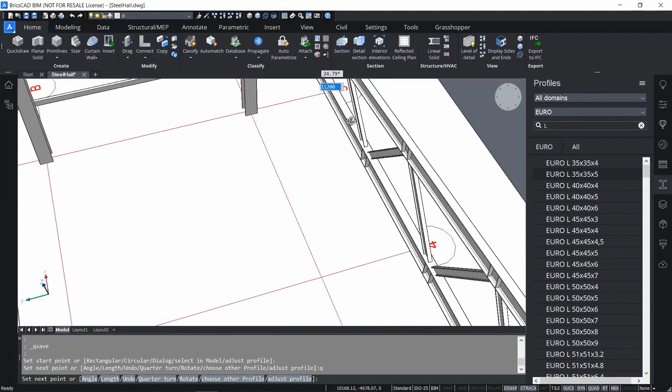So I shift select this face. I want to quarter turn it so that it's facing towards the flange of my I-profile. I want to have it until here, so I select this midpoint. And I just click enter to accept and escape to exit the command.

As you can see now, it's still interfering with my solids. So again, I have to add some eccentricity to it. I choose upwards, choose enter, and now it's on top here.

It's a bit sticking out of my structure, so I will just move the grips a bit. Just grab one of the green grips and drag it until it doesn't stick out anymore. You can do that here as well. Just grab the grips until they don't stick out anymore.

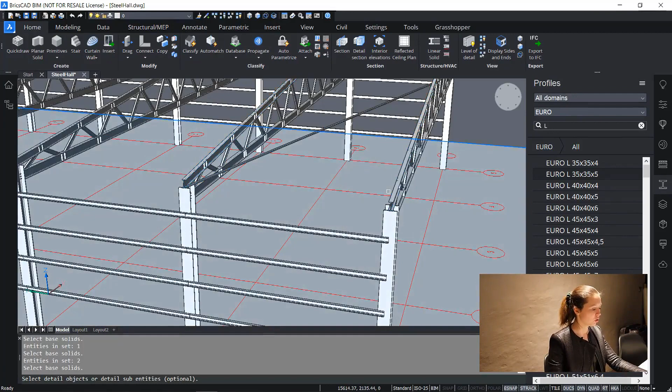And then we will use propagate again. So go to the Home tab, choose propagate on the top beams. Choose the detail object, the brace, the diagonal brace. And then it's asking me as a copy or as a block. Again, I will want it as a copy.

And then it will take some time to find the suggestions. You can toggle all the question marks on. So you can click on them individually or make a selection mark over it, so that you have all the suggestions.

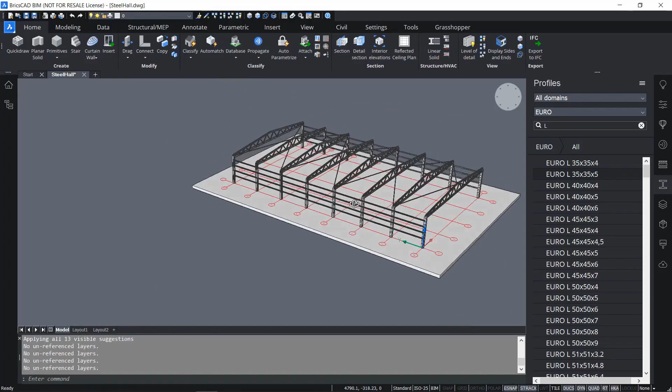And then we can make a pattern like the one that I will now create, because we want it to resist wind forces. So we want kind of a weaved pattern, an up-down, left-right pattern, so that we have crosses instead of just diagonals. Then press enter to apply them all, and you will see that now the braces are created, so our structure can already resist wind forces.

Then yet another optional step is to add some columns in the front portal. How will I do that? You can create a new column. So go to the HEA category again and choose the one we had for the column, but just rotate it the other way around now, so that it's rotated with its flange along the A axis instead of along the 1 axis.

And then you need to give a dimension of 4,480, so that it just fits under our structure.

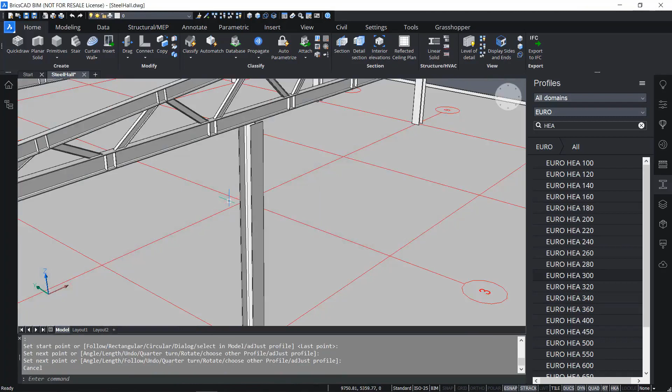Now what I want to show you is how you can easily copy this solid along with display sides and ends on. So you display sides and ends, you put it on. You can also put it on here in the Home tab. And then if you hover near a side of the column, it will show you the side of the column, and you can BIM copy the entire column at once.

So go to the Modeling tab and choose BIM copy, and then you will see it will copy the column. You're given a dimension of 5,000 because our grid cells were 5,000 apart, and again for the next one 5,000. You then have 3 columns, and we want them in the back as well. So turn on face detection as well, because you want to have the face side of the column.

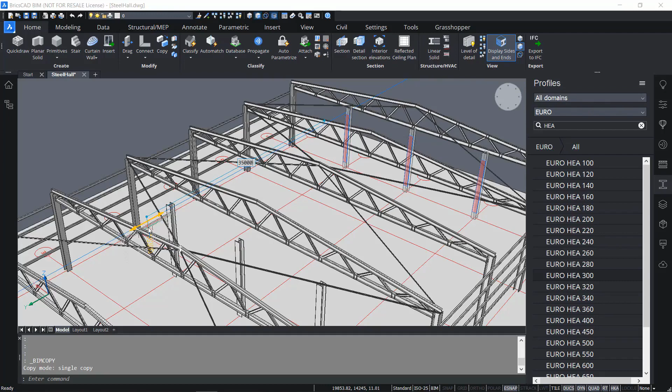So you turn on face detection and display sides and ends, and you can select multiple ones as well. Choose BIM copy to copy them all at once. So you have selected those 3 and they display in pink. If you choose BIM copy, you will see that they are attached to your cursor. And now I want 35,000, because that was the length of our grid. Then just press escape, and you can see that now in the back there are also columns.

So you could now mount a cladding on top of these sides of the beam. To conclude, I will make some cross beams on top of our roof structure so that you can mount a roof structure on top. How will I do that?

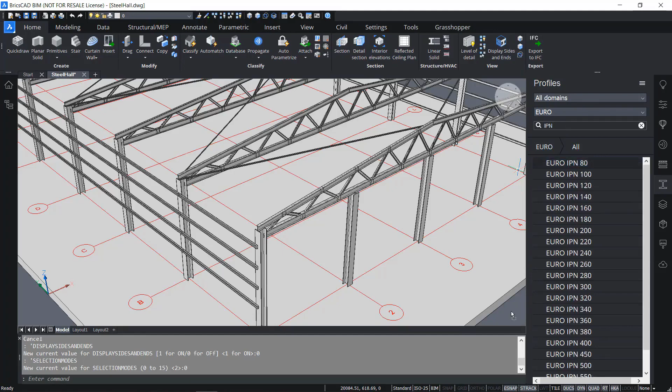I will again choose a profile. This time you want to put out display sides and ends and face detection, and you want to select an IPN 80, and you want to drag it onto empty space in your canvas. You want to start from this point, and then model all the way to the end. So you could model all the way to the end, or you could type in a dimension of 35,100, but I will just model it like it is. Then press enter to escape the command.

As you can see now, it's not correct, it's again crossing our other beams. So go to the structural tab and add eccentricity. Then choose the up right arrow so that it looks like this, so that it's on top of our top beams, and press enter to accept.

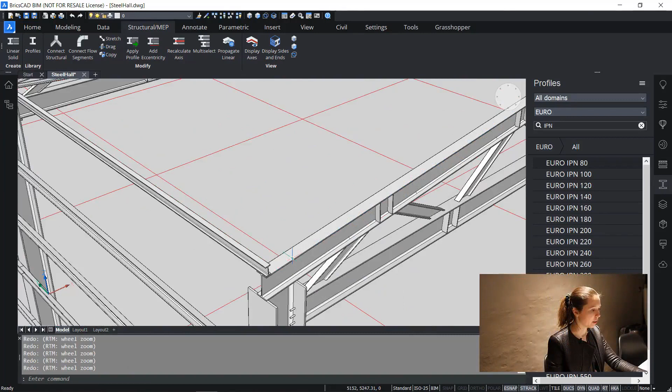So now we already have one cross beam, but we want to have multiple. So what should I do? I will create a rectangular array. But a rectangular array will always be made in the current user coordinate system. So we have to change our user coordinate system to the top of this beam as well. So type in UCS.

And choose the top face, then choose enter to accept. And then you should see the x-axis along the slope of the top beam. That's how you can create a rectangular array in this face. So go to the model, go to the draw tab in your no selection quad and choose rectangular array, and choose the cross beam to array it. Then you see that it will go into this face that we just selected the UCS from.

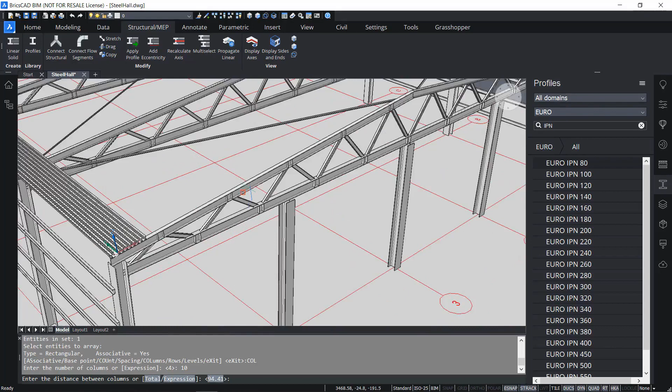And you want to adjust the amount of columns, so type in column. You want 10 cross beams, so these are 10 columns of the array. Then you want to specify the overall total distance among which the 10 beams should be distributed. So I type in T for total, and I start from this point of the first cross beam to the middle of our construction, so the end point of the top beam. Then you see it's evenly distributed among our half of the structure. And then press enter to exit.

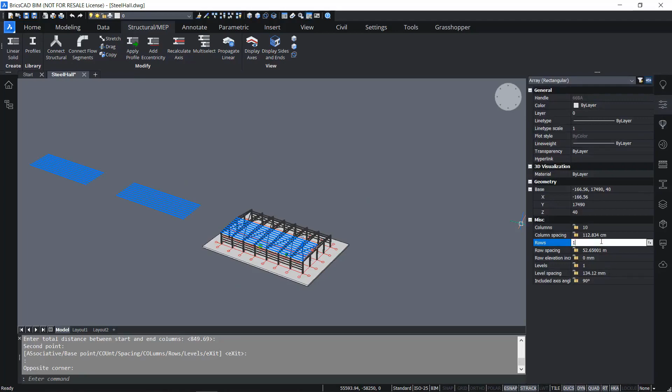And if you now see, you will have 3 rows. We can still adjust that in the properties panel. So go to rows and put it onto 1. In here in the miscellaneous, you can put it onto 1. And then you see you only have one array left.

And now we want to mirror this, but we want to mirror it in the world coordinate system. So type in UCS and put your coordinate system back to world by pressing enter and accepting world. Now type in the mirror command. Then select the entities to mirror. That's of course our cross beams.

And then the start of the mirror line is one of the middle grid axis intersections, and the end of the mirror line is also the next intersection point. So that's the middle of our structure. You can easily find it based on the grid. And then you want to keep entities, so type N for no, or just press enter if that's already the suggested approach. And then you will have this nice steel structure with cross beams on top.

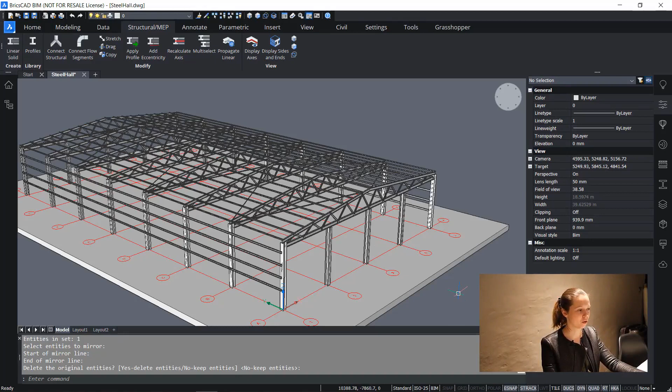And that's where we conclude our demo, and I will just show you in all its glory our steel structural hall. So you can view it from different angles. That's really all the effort that has been put into this, and you can still model it further to make, for example, cladding on top of it, or just let your imagination loose, and that's about it.